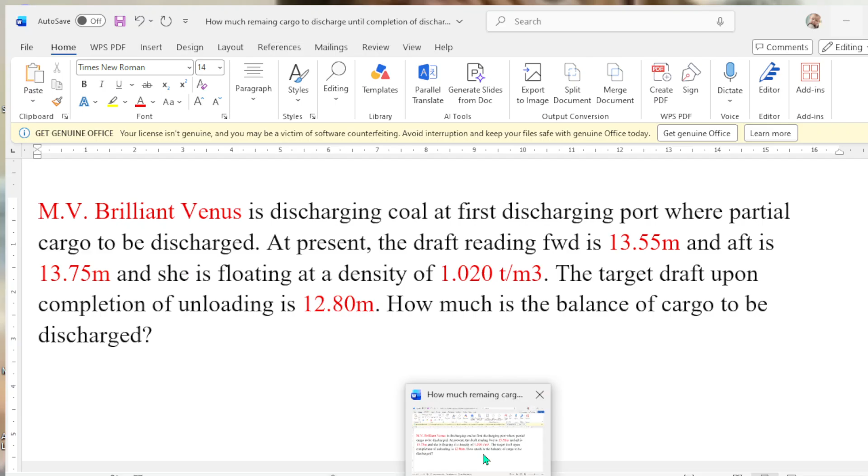This is the scenario. MV Brilliant Venus is discharging coal at the first discharge port, where partial cargo is to be discharged. At present, the draft reading forward is 13.55 meters and aft is 13.75 meters. She is floating at a density of 1.020 tons per cubic meter. The target draft upon completion of unloading is 12.80.

The question is how much is the balance of cargo to be discharged? So from 13.55 going down to 12.80 meters, how much cargo will be discharged to reach 12.80? How much will be the cargo balance to be discharged upon completion of unloading at 12.80? Okay, let's start.

This is how to find trim when handling several moderate weights. This is form number 6. The name of the vessel is MV Brilliant Venus.

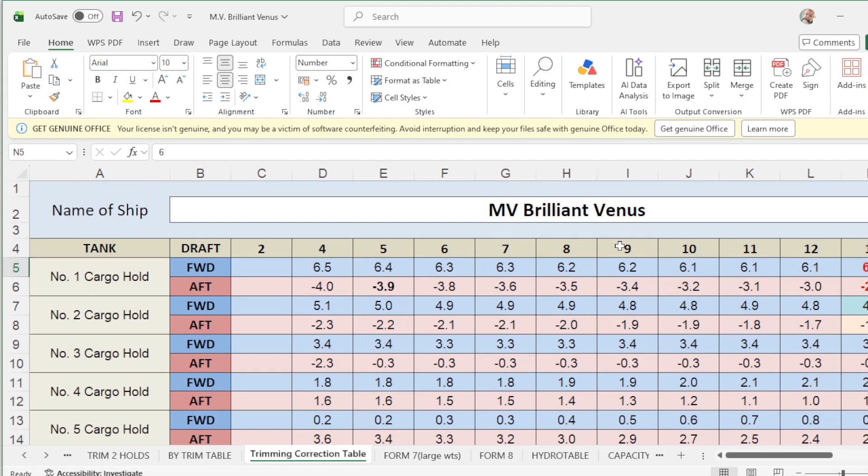Let's start here. The draft forward is 13.55. So put here 13.55, and draft aft is 13.75. So 13.75. Your mean draft is 13.65, your trim is 0.20 meters, your LCF, MTC, and TPC.

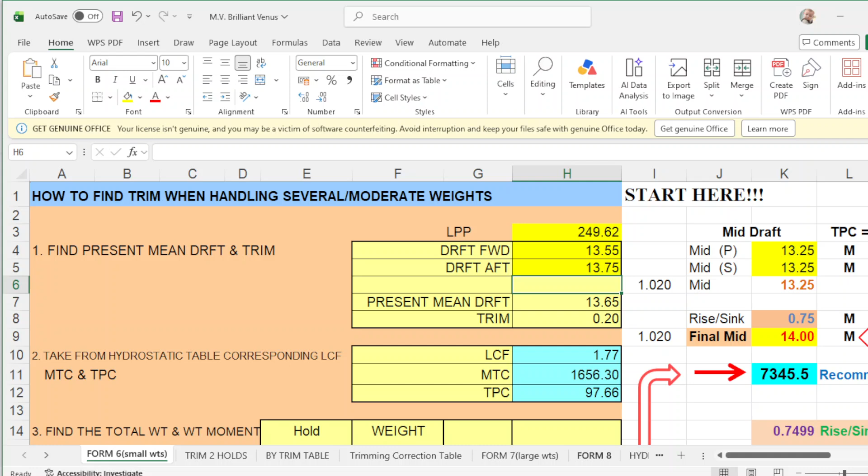Your actual mid port draft should be 13.65, and the actual mid starboard draft is 13.65. Take note that the draft of completion is 12.80.

Now take note of the question. How much is the balance of cargo to be discharged to reach from 13.55 going down to 12.80? So how much cargo is going to be discharged?

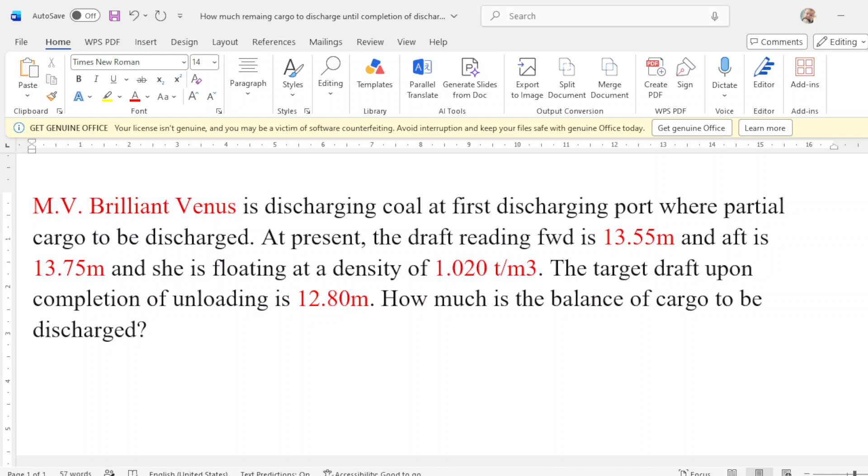And the answer is 8,243. That is the answer to the question.

Now the question stops here. Double check: 13.55, 13.75, mean 13.65, 12.80. So this is the remaining cargo to be discharged.

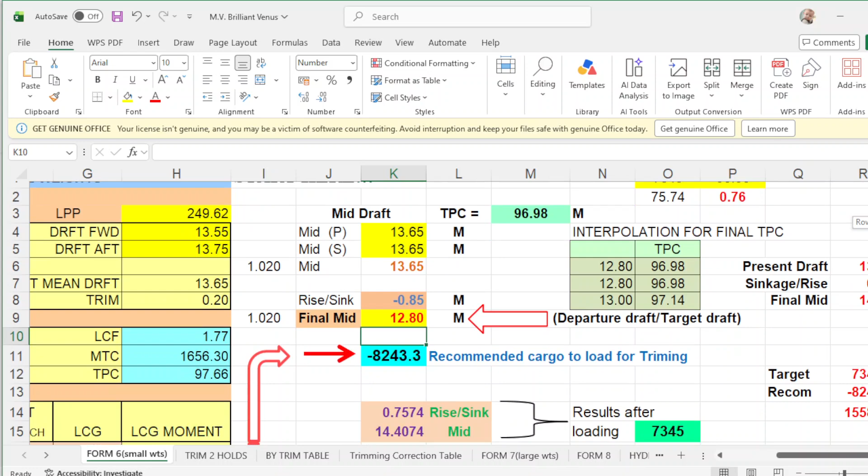This is where the question stops, but we will continue, guys. So in discharging, just follow this one, then write, let's make this a whole number, that will be negative 8243.

8,243. Press enter. And take note, guys, upon discharging 8,243, your mid draft will be 12.80, which is actually the same here. And the rise of the vessel is 0.85 meters.

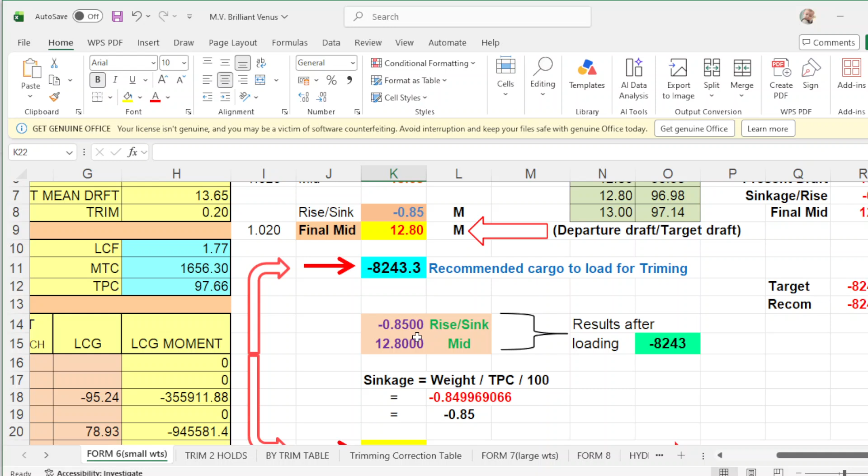Take note that actual cargo to be discharged is 8,243, and your TPC is 96.98. So negative 82.43 divided by 96.98, that will be negative 0.85. So your present draft of 13.65 minus the rise, that will be 0.85, and your final mean is 12.80, which is exactly the same here.

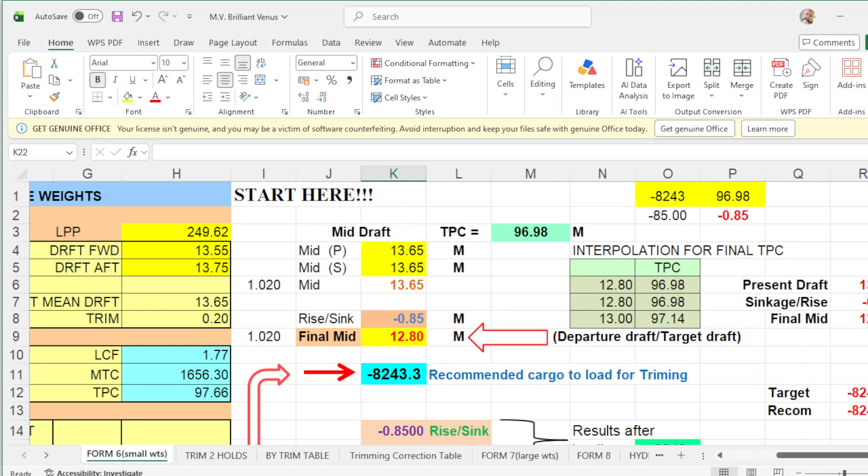Take note the target is negative 8,243, and the recommended is negative 8,243, so this is a difference of 0.3. Then this is the actual cargo to be discharged.

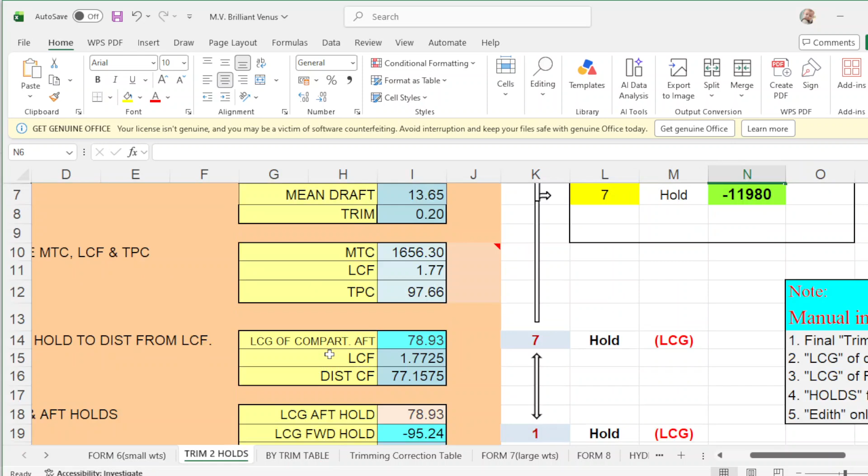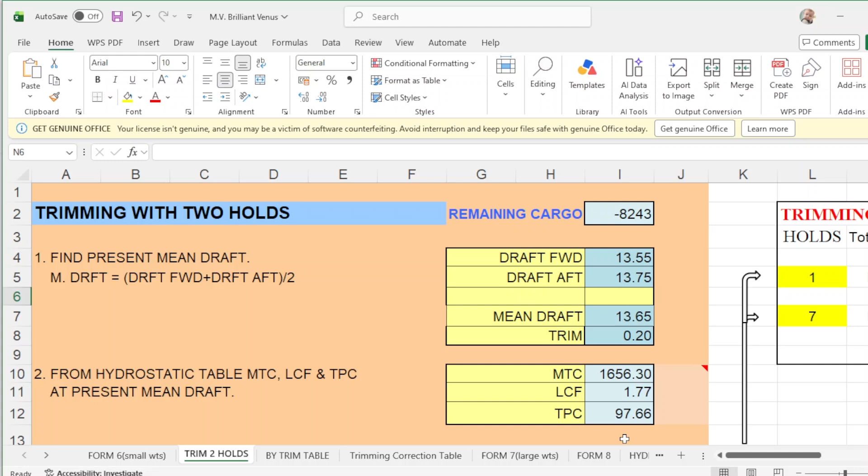Then you go to trim, holds 2. Go up, take note of the cargo to be discharged. This is trim with 2 holds. Cargo to be discharged is 8,243. Your initial draft, your mean draft, trim, MTC, LCF, and TPC. And the cargo to be discharged is from hold number 1 and hold number 7.

So, you want to make the vessel even keel, so no trim, put 0. Or let's say you want to have a trim of 10 centimeters, 0.10.

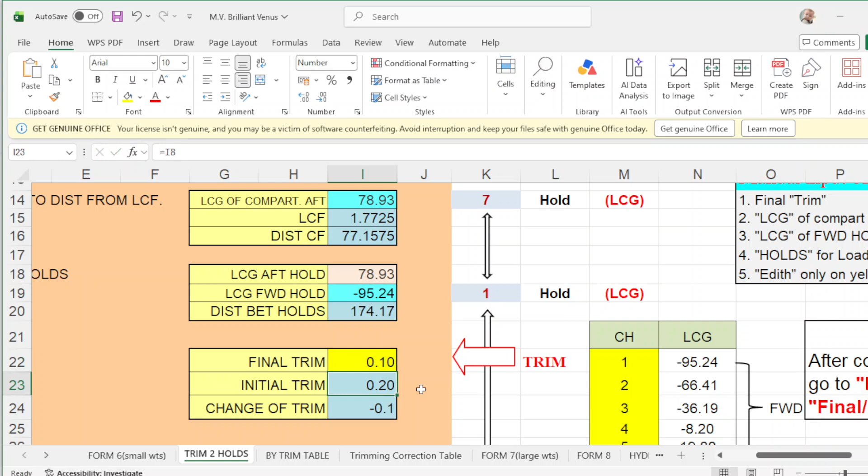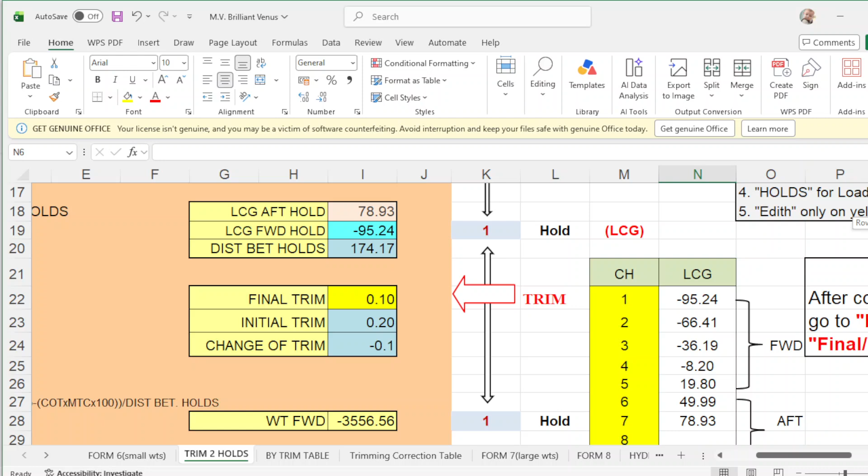And cargo to be discharged in number 1 is 3556. Let's say 3556, negative 3556, that's correct. And number 7 will be negative 4687.

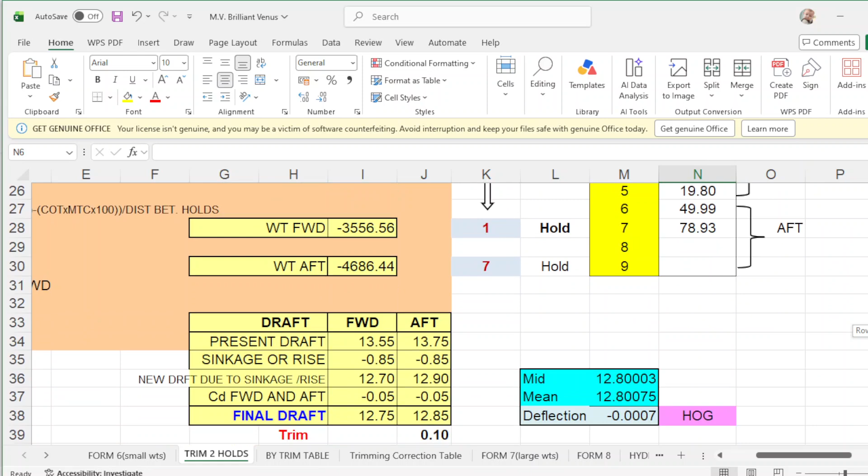And your departure draft would be forward 12.75, aft would be 12.85. Your trim is 10 centimeters, and your mean draft is 12.80. And your hog/deflection is 0, hog condition.

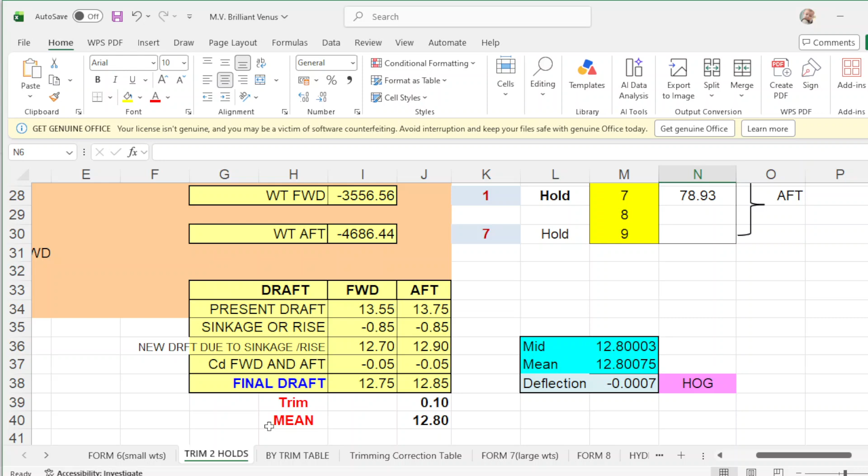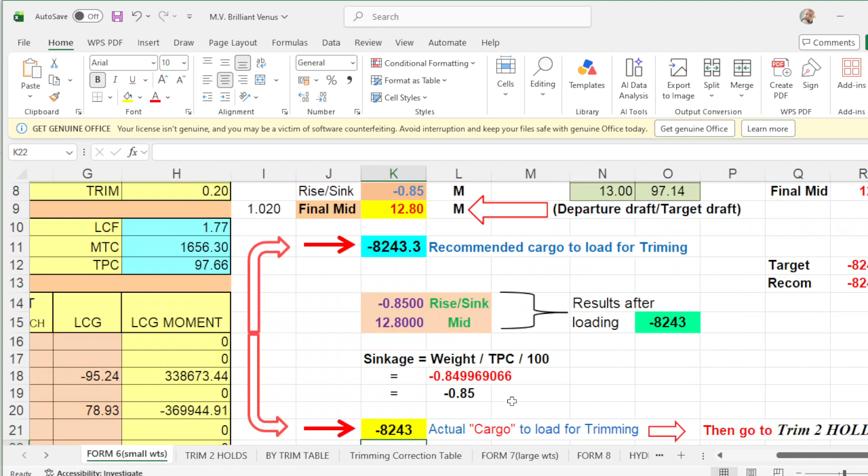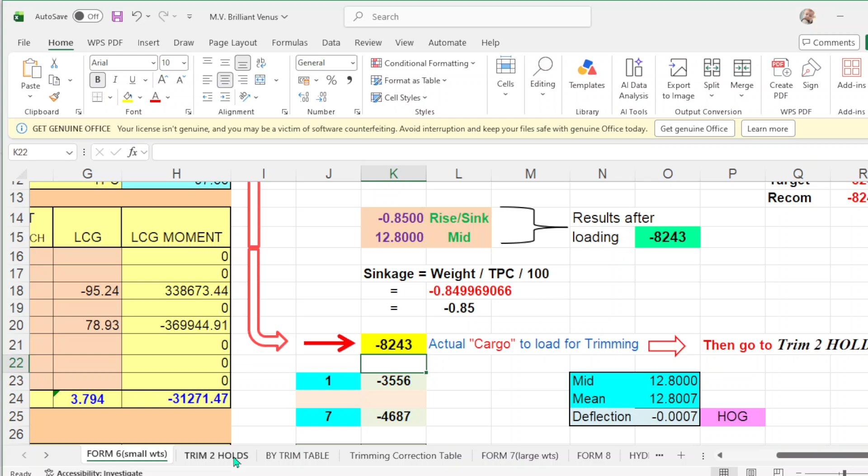So we go back, take note of this figure, guys. Number 1 is 3556, number 7 is 4687. Then we go to form number 6, go back, and take note that the cargo to be discharged: number 1 is 3556, number 7 is 4687.

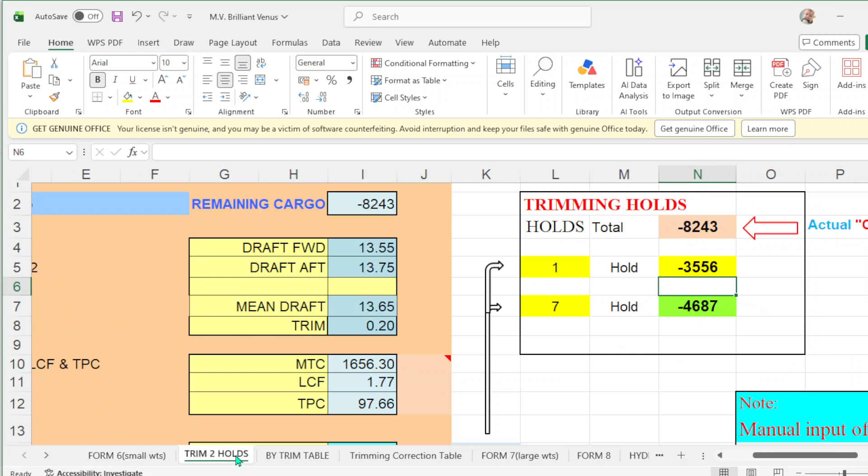Once the figure is correct, in number 1 place the figure, and number 7 put the figure, and apply the LCG. What is the LCG of number 1? LCG of number 1 is negative 95.24.

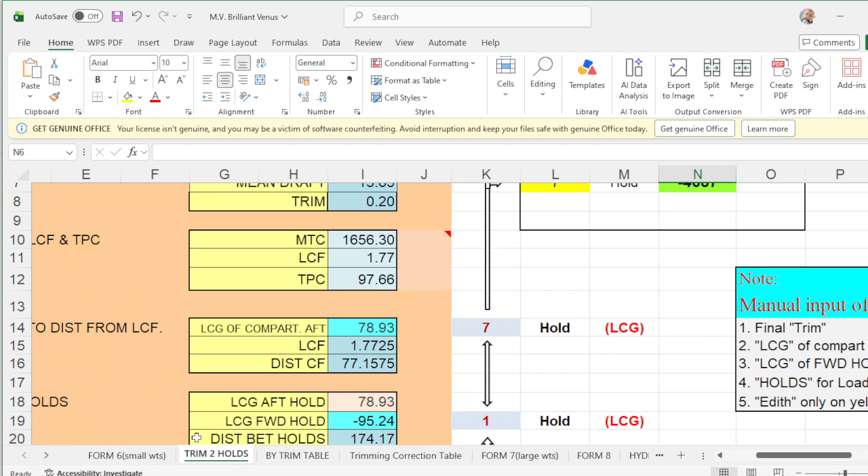Then this will be your program number 1, program number 2, and program number 3. This is the by-trim table. So this is the weight to be discharged from hold number 1 and 7, and the way to be discharged. The correction for hold number 1, forward correction is this one, and aft correction, and number 7 forward and aft correction.

What will be the drop here? Our draft should be 75 and 85. Well, anyway, what is the correction for forward number 1? What will be the trim here? What will be the drop? That will be almost 13. Okay, 13. So we choose 13.

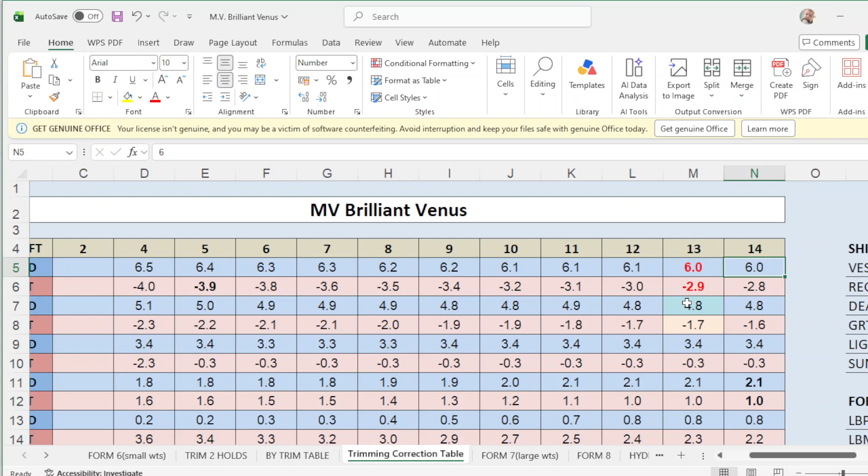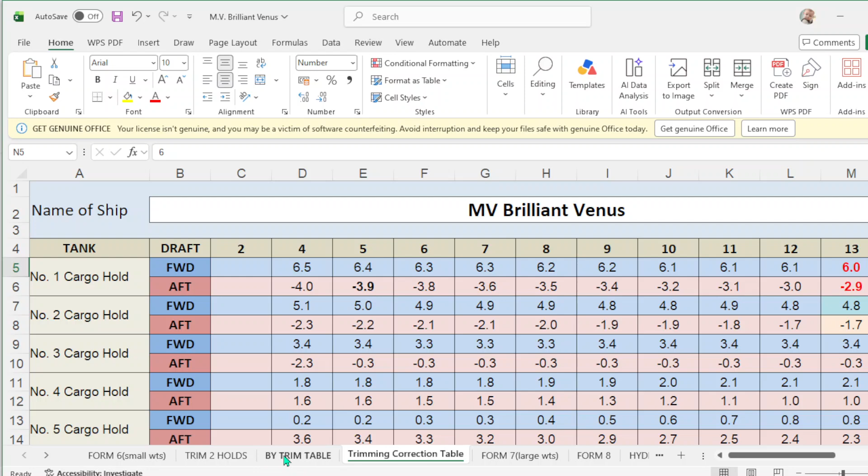Okay, here 13. That will be 13. Hold number 1 and number 7 is 13. So what is the correction in hold number 1? Forward is 6. Put here 6. Again 6. Okay, put 6. Put here 6. Enter. And now correction is how much?

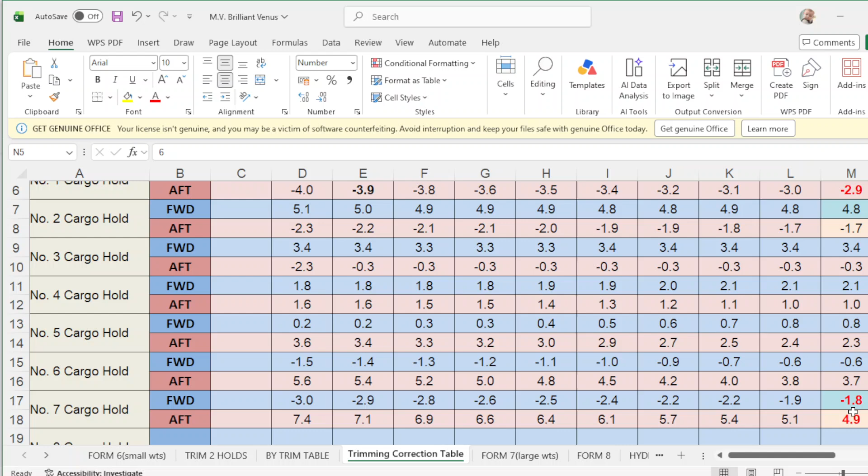Negative 29. Negative 2.9. And correction in number 7. Go down. Forward correction number 7 will be negative 1.8. And aft correction will be 4.9.

What will be the drop here? 11. Make it 3. 12. Should be how much? 12.75. 12.75. Okay.

Make this 2. Enter. Okay. Make this 1. For example. What happens? Enter. 12.75. Make this 0.

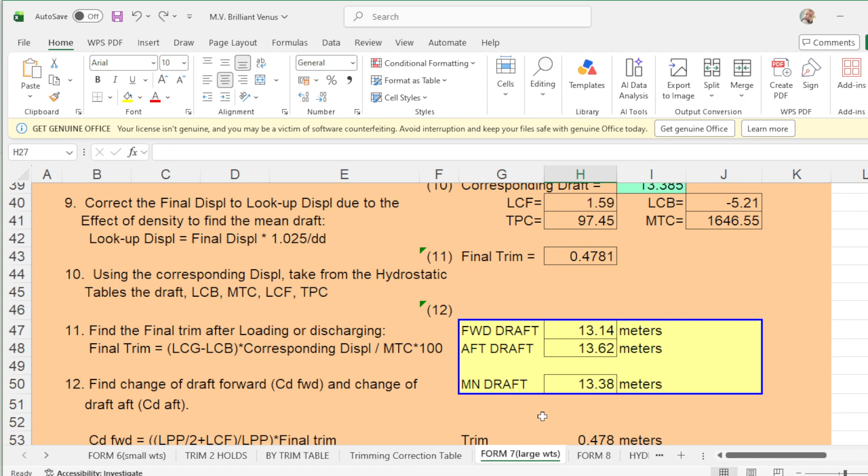Trim 2 holds, and by trim table. Okay. Then we go to the fourth program, which is form number 7.

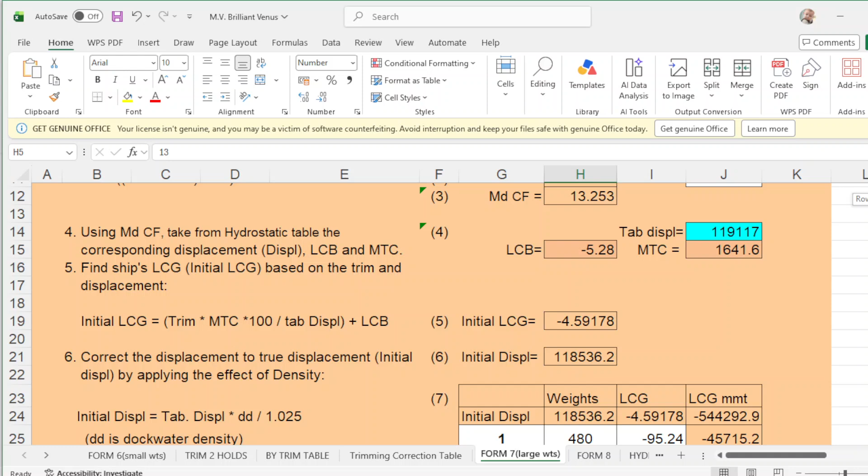How to find draft and trim when handling weights involving large changes in mean draft. And take note that the density is 1.020. 1.020. So 1.020, and the density upon completion is 1.020. Okay.

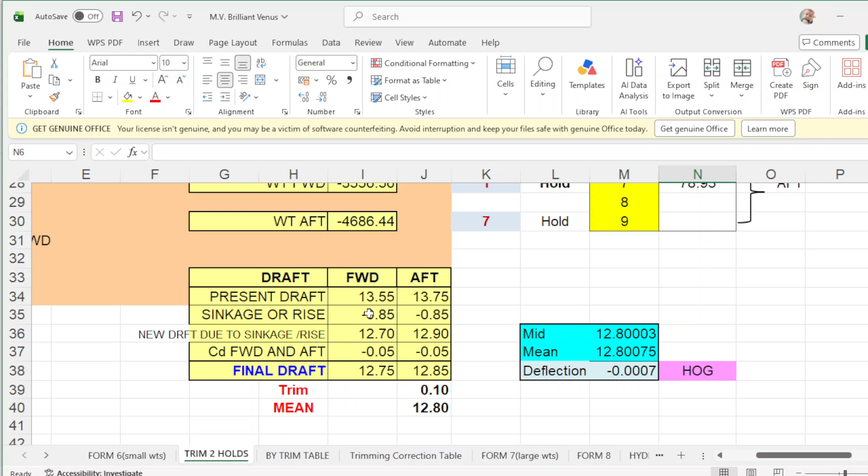How much is the draft forward? Forward draft is 1355. 13.55. Draft aft is 1375. 13.75. Okay, your mean is 1365, trim is 0.20.

Then you apply the cargo in hold number 1. How much cargo to be discharged is negative 3556. What here? 3556. And number 7, how much in number 7 is negative 4687. Negative 4687. Is that correct? Negative 4687. Okay.

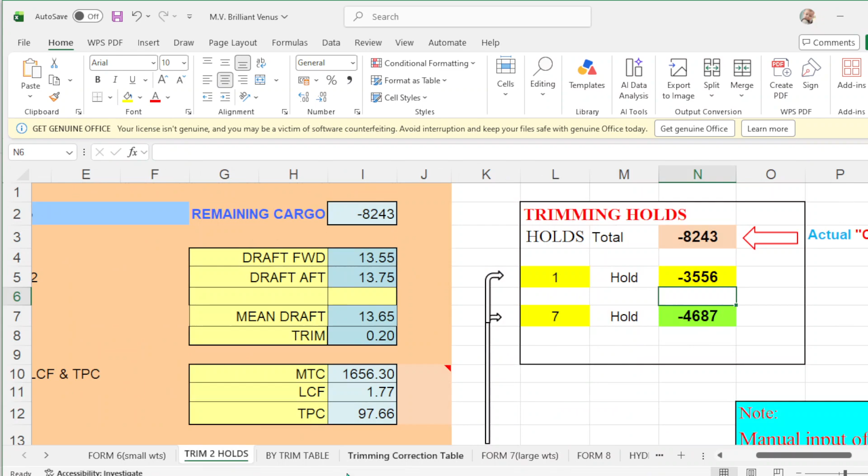And the LCG of number 1, LCG of number 1. LCG is negative 9524. Negative 9524. Number 7 is 787893. 7 is 7893. Confirm.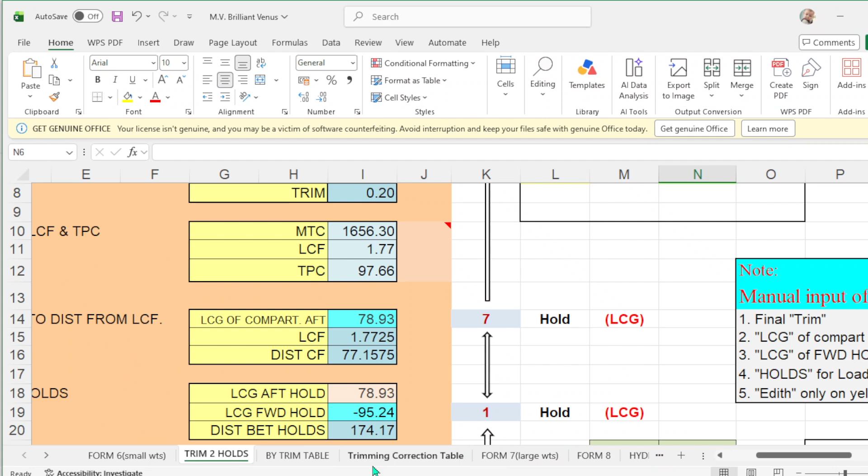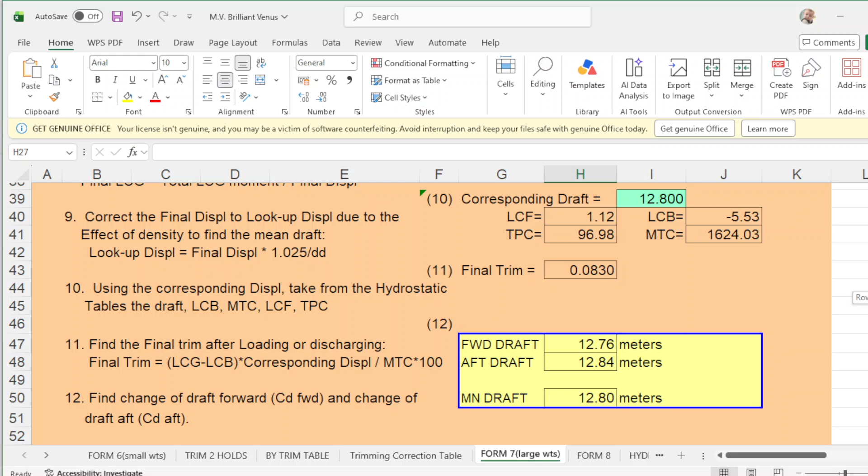And what will be our draft? Mean draft is 1280, and the forward draft is 1276. We have 1275, and aft draft is 1284. Aft draft is 1285, and your mean is 1280. Okay, 1280.

Your mean is 1280. Your trim is 10 centimeters, and your trim here is 8.3 centimeters because of this draft forward and aft. But anyway, what matters more is your mean draft of 12.80. Regardless of your draft forward and aft, as long as your mean is 1280, that's okay.

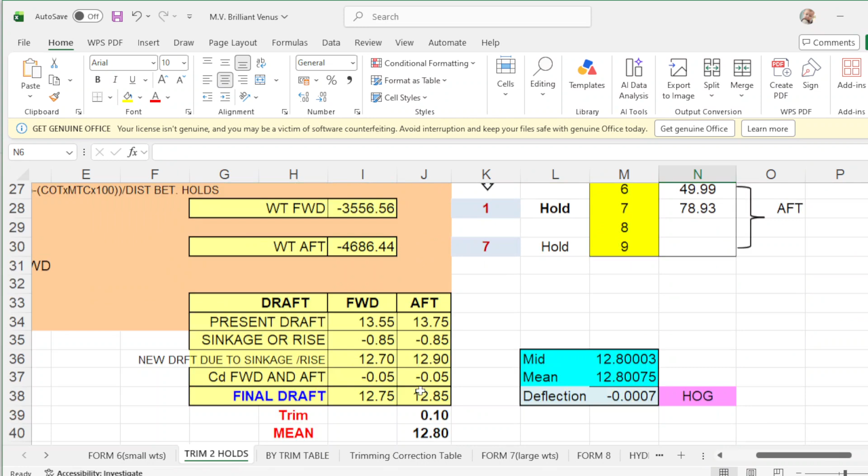You will still get the cargo, and your mean here is 1280 and your mean is 1280, meaning you still hit the target. And here the mean draft is 1280 and your mean is 1280, so it's no problem. And here the mean draft is 1280, mean is 1280, so it's almost the same.

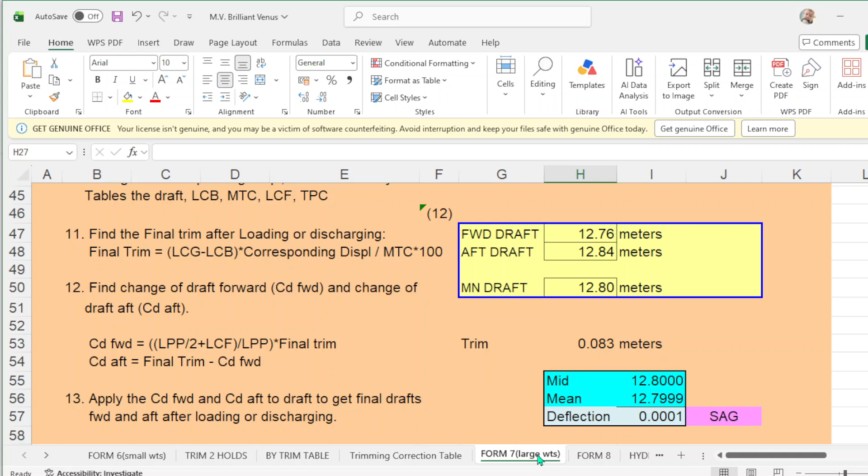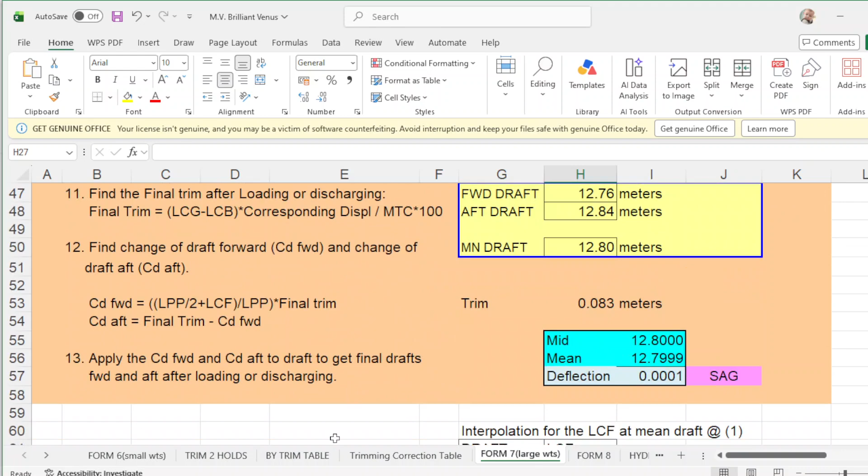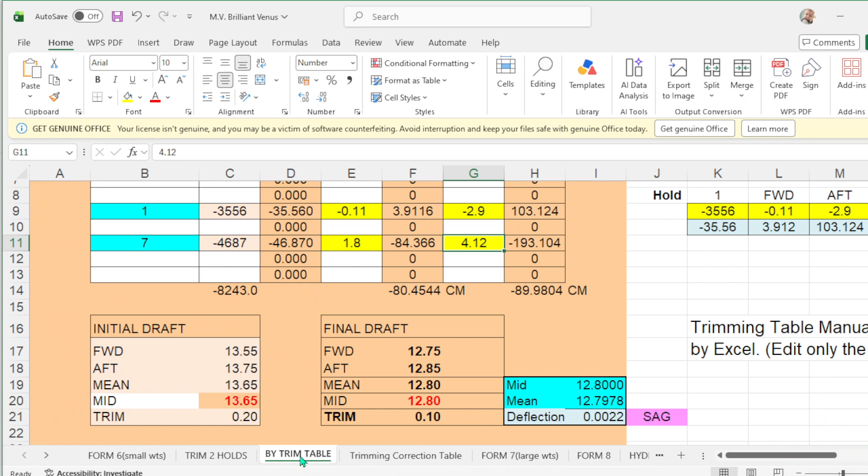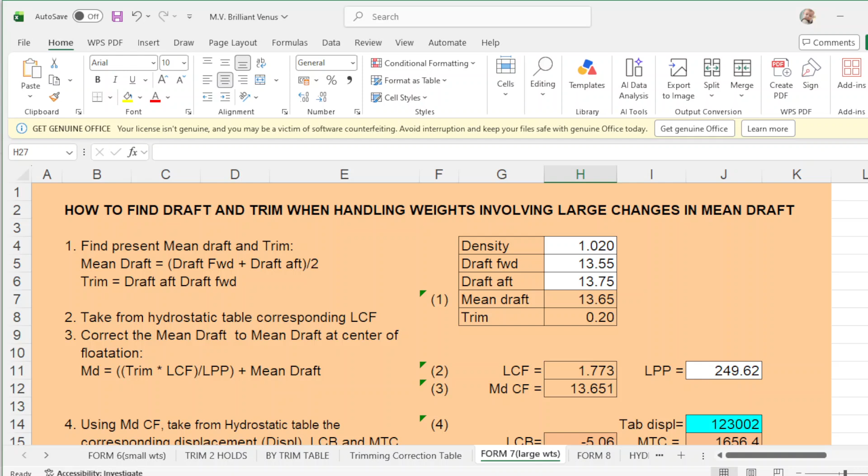So that's it, guys. So you have 4 programs to back you up. Your form number 7, which is this one. For number 7, you have the trim table, and you have the trim 2 holds, and your form number 6, which is find trim when handling several moderate weights. Trim 2 holds, trimming with 2 holds, trim table, trimming table, and the last one, form number 7, is how to find draft and trim when handling weights involving large changes in mean draft. Okay, and this is almost the same with the rest of the program.